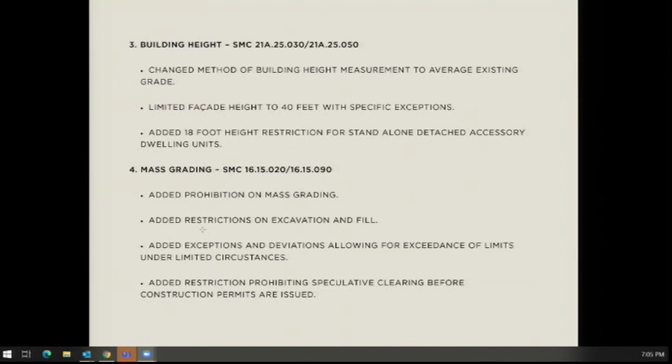Next slide. We also took on fence heights, where we added an allowance for fences up to 8 feet, limited to 32 feet in length along any setback line with an agreement from the neighbor and with the building permit. We also addressed parking, where we added a requirement that one additional parking space be provided for each new lot created through the subdivision process.

We added clarifying language regarding where the parking must be located, with a priority hierarchy. Next slide. We added a requirement that all new lots created through subdivision must have a presence on a private or public street through 30 feet of street frontage, and we added flexibility allowing averaging of street frontage across a project with a minimum of 20 feet and a cumulative average of 30 feet.

We also added a prohibition on work in critical areas without first obtaining a permit. We also refined the exceptions associated with that.

One thing I want to point out that I think is important for us to keep in mind is that although we made these changes in 2019, we have not seen many of them actually hit the ground in construction yet. As we've talked about before, a short subdivision or subdivision can have a shelf life of 12 to 14 years, and you might find that some rules from the past are still being built, or some projects vested to rules of the past are still being built today. That may continue for several more years, since these rules were just put in place in 2019.

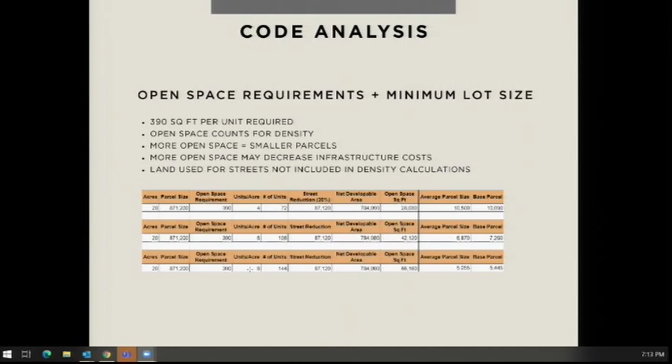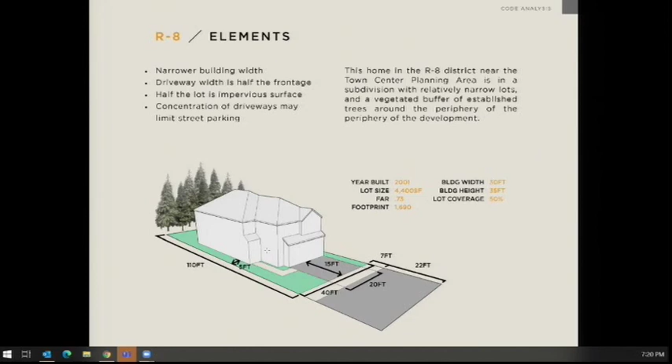This is another R6 example, and you can see it's very similar. The lot is a little bit wider, but you have a 30-foot driveway here, which again takes up a good portion of the frontage. It's almost a 5,000 square foot lot, with a floor to area ratio of 0.7. So even though it's R6 versus R8, you're getting a very similar development outcome, and that's partially because of the ability to set aside land as open space and count it towards your project density.

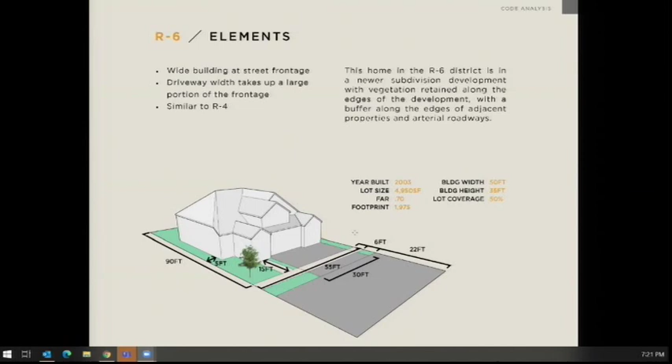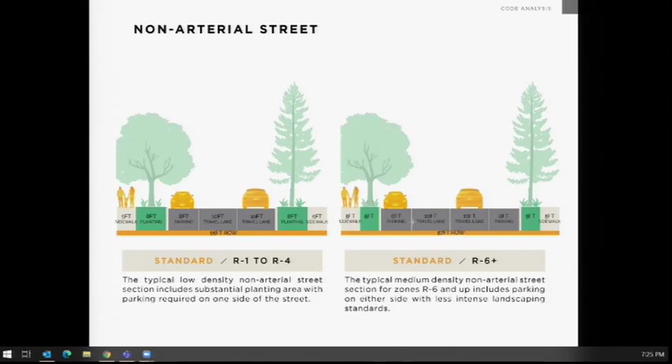The result is you end up with an unnecessarily wide set of travel lanes and parking, which can induce higher traffic speeds and potential safety issues. So one thing we're trying to do is right-size that amount of parking. We certainly don't want to undershoot, because there have been parking challenges in some neighborhoods, but we also don't want excessive asphalt and parking where it's not needed—it contributes to environmental issues with stormwater runoff, and it's expensive to build and maintain. So we want to be a little more targeted in how we apply these street sections.

And with that, I'm going to turn it over to Leslie to talk about the design principles, which are the first part of our neighborhood design standards section. So Leslie? Great, thanks Jeff.

The design principles really get at the question of what do we care about, what are we trying to accomplish with all these standards we're writing. These spring from the comprehensive plan, the vision statement, what people care about and want to see in their neighborhoods. We found the input we've gotten over the course of the project has been very consistent with what's spelled out in the comprehensive plan. So these are a basis for our decision making and what we're trying to accomplish with the regulations.

One thing we've heard loud and clear is that Sammamish really values the ecological function of the land and natural systems. So what can we do with these regulations to make new development fit better into the ecological systems that are there? This includes retaining the form of the land—you can't transform the site to create the easiest footprints for your buildings. Your development has to fit onto the site itself. Retaining the trees is important, and retaining them in a way that they will stay healthy for the long term.

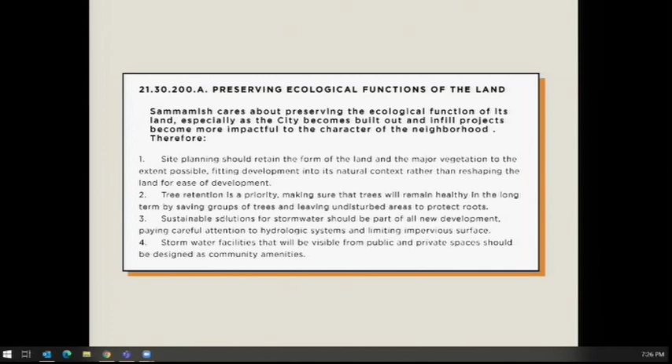The green Northwest character goes along with that. So that's talking about landscaping, buffers for sure, and the issues with topography, so that grade is handled in a sensitive way rather than just cuts and fences and retaining walls. There's a lot of solutions for doing that in ways that are attractive.

The interface that's public along the street is something that we care about the most. As you can see from the examples that Jeff showed, the garage entries really have an impact, whether the whole street ends up being frontage for the garage, or whether landscape can be incorporated in that important public face of homes along the street.

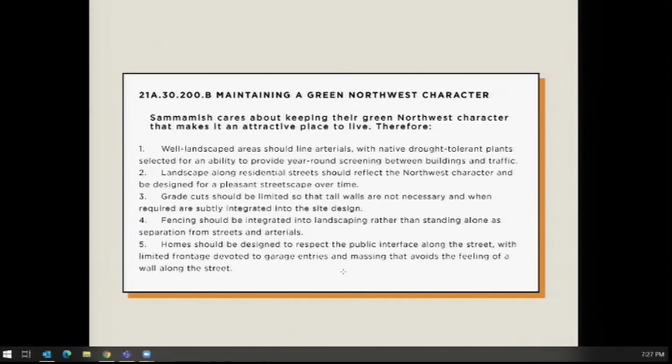The well-connected community is in a lot of ways about a walkable neighborhood. A lot of people are talking about 15-minute neighborhoods where you can walk easily to schools and small businesses. So the idea of having kids and bikes be able to move around neighborhoods is really important. There's some great examples of that out there with some shared streets.

In the neighborhood guideline thinking, we want to make places where people feel comfortable walking, where walking is an attractive option, especially where vehicle speeds can be lowered.

We also want to make it family friendly. Sammamish is very much a family friendly city, and the idea of people being able to walk and bike comfortably of all ages, 8 to 80.

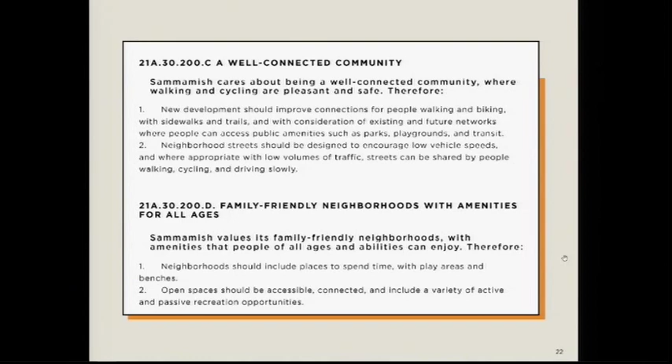That's something that when people especially are thinking about the subdivisions and the larger developments, planned unit developments, those are the kinds of things where some of these linkages, some of these gaps can be reconnected or connected.

Thank you, Leslie. So the design principles are intended to be more explanatory and to orient the applicants around the goals of the comprehensive plan and what the community would like to see in terms of development outcomes.

Oftentimes you'll hear developers or designers say, just tell us what you want. Sometimes it's hard to interpret from a series of just technical standards what exactly is the desired outcome. So those design principles are intended to support that conversation.

Applicants will be required to submit as part of their application statements on how they're furthering the design principles. But when it comes to approving or denying a project in terms of the review, the design standards will carry the day. And that's what these sections are—they are essentially the implementing piece for the design standards.

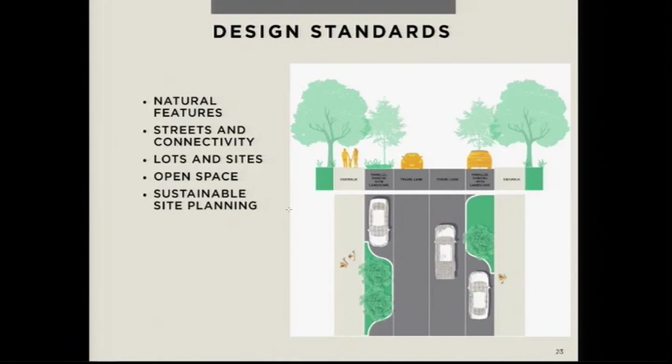So the topics include protection and incorporation of natural features, streets and connectivity, lots and sites—so how you're laying out your parcels and your developable area—some new criteria for how we deal with the preservation of open space to address some of the issues I described earlier, and sustainable site planning, which primarily deals with stormwater and other approaches to dealing with runoff in more environmentally sustainable ways. I'll just highlight a couple of the standards.

One of the things that was in our scope early on is to develop arterial frontage standards. So this would be for new subdivisions in terms of how they relate to one of these arterials. This map shows major arterials, minor arterials, and collectors. Those streets highlighted would all be subject to these new arterial frontage standards.

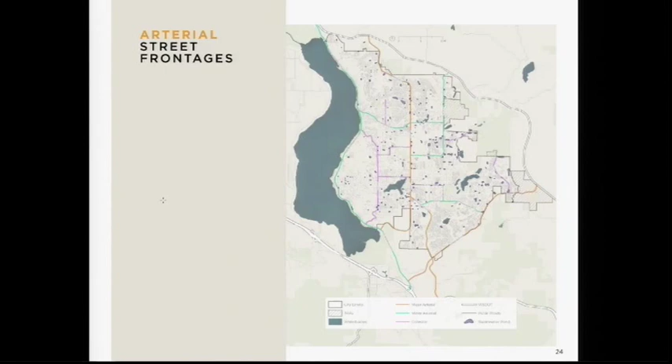I'd also like to point out that because the city allows for the set aside of open space or buffers and that it be counted towards density, none of these standards should limit the number of units that can be developed. Overall, the design standards are exactly what they are intended to be, which is to influence the design of the project, but they're not necessarily meant to be limitations on the number of units that could be developed. It's more around how you organize the features in your development.

We've developed a number of arterial frontages that would be allowed on those streets, and I think the default one is the forest. So like the tree farm, if there is mature forest that contributes to that Northwest character, we'd like to see that preserved—preserved for the first 100 or so feet, with some modifications that can happen as part of that. There are opportunities to, within that area, integrate trails or open space features. Again, this would not reduce the amount of units that could be developed.

The next one is stormwater or green infrastructure. There's lots of examples along arterial frontages of stormwater ponds. Some are simply large vehicles for retaining water with chain link fences around them and really not much vegetation.

Others, like this diagram here, which is a representation of a real example I believe on 8th, is a more natural looking stormwater pond. It's got a nice split rail fence, nice vegetation. It's a visual and physical amenity. And so the standards do address the design of stormwater facilities when they're placed along an arterial frontage.

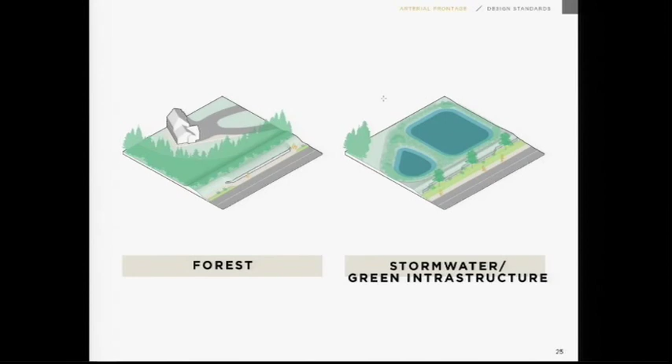And again, this land that's set aside, as is currently in the code, can be applied to project density in other parts of the site, so it doesn't reduce the number of units that can be built.

Landscape is another one. So in areas where there isn't mature forest that can be protected, you could have a landscaped area or buffer. There's some flexibility on this in terms of its width that we've incorporated into the code based on comments we've gotten from the public during the public hearing.

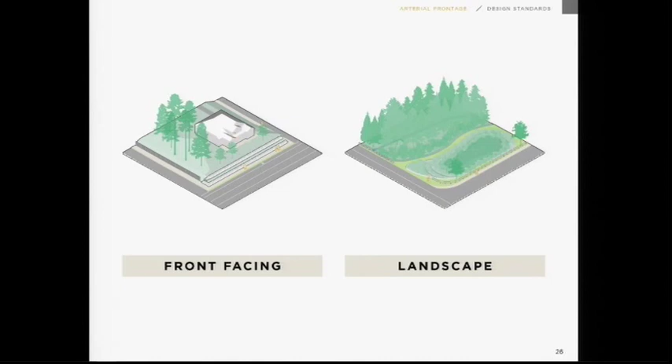This front-facing applies only to existing lots. So if there's an existing lot that's already been subdivided for single family, you have to orient your house towards the arterial with access from the side or rear. So we don't just have rear decks or rear parts of the facade facing directly onto the arterial. There are some examples where developers have already done this in the community.

Open space. There is an open space requirement, 390 square feet at least. You could choose to locate that along the arterial frontage, use that density elsewhere in the site, but create a nice visual character along the arterial and provide amenities for people that live in the neighborhood.

So that's a highlight of the arterial frontage standards. Now moving into site design.

These standards address primarily the relationship of the size of the home, what you see above ground. So this would include your garage and anything above ground. It would not include a basement or anything below ground.

What we're proposing is that there be a base limit floor area ratio of 0.5. So the size of your home can be no larger than half the size of your lot. If you have a 5,000 square foot lot, you can have a 2,500 square foot home. If you want a larger home, then you're going to need a larger lot. And as we just showed, there's flexibility to do that within the existing code.

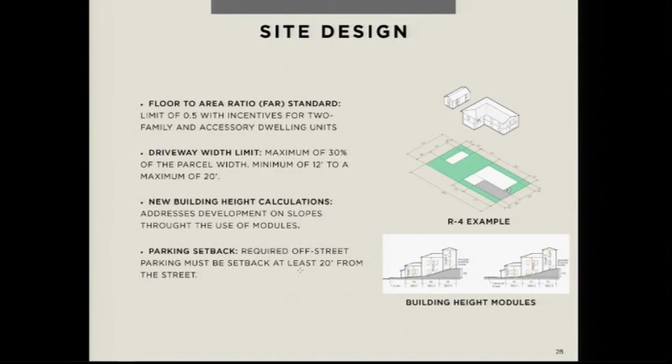Here are more examples, and there's lots of flexibility in how this could be designed. For example, a 10,000 square foot lot could have up to a 4,500 square foot main house, or you could reduce the lot size for a smaller home. With an attached garage of 440 square feet and a detached ADU of 1,000 square feet, you'd end up with lot coverage of 28% building coverage and 61% yard area, the open space left over from buildings and driveway. This also provides more green space for green stormwater approaches, with an emphasis on achieving more on-site retention and infiltration.

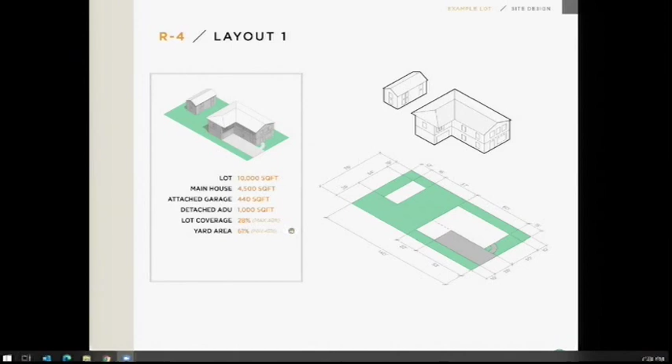This is another option. The previous example showed a narrow lot along the street edge; this one shows a wider lot, and both can work. You can see the 20-foot driveway, with the house oriented the long way, but still with opportunity for an ADU, on-street parking, and areas for stormwater treatment.

Clearing and grading. We've made some fairly significant proposed changes here. Under the current code, there were quite a bit of exemptions for clearing and grading—if you weren't dealing with significant trees, or only dealing with relatively small trees, less than 12 or 8 inches caliper depending on the type, which is still fairly large, you could go in and clear.

What we're proposing is that to get a clearing and grading permit for an individual lot, you have to have an approved land use permit, which requires showing a site plan of what you're planning to develop—where the house footprint will be, where the driveway is, and so on—as opposed to allowing mass grading and clearing at the subdivision level. That's a big change; it would essentially eliminate preemptive clearing and grading of sites. Things like understory, which is very important for stormwater and the environment, would be preserved until development, which I think will have a major impact.

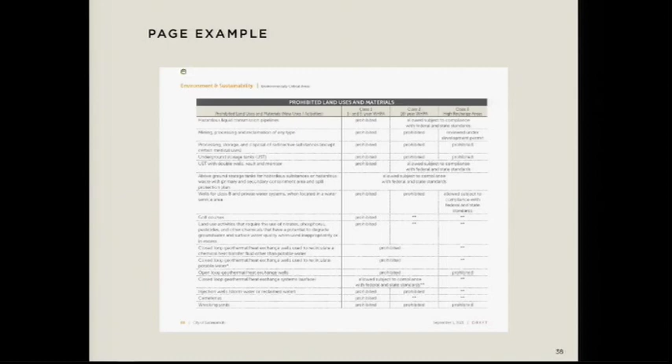This is just a table example, an existing table from your critical areas section, with a nice consistent look and feel. You can see the header has changed to highlight the chapter.

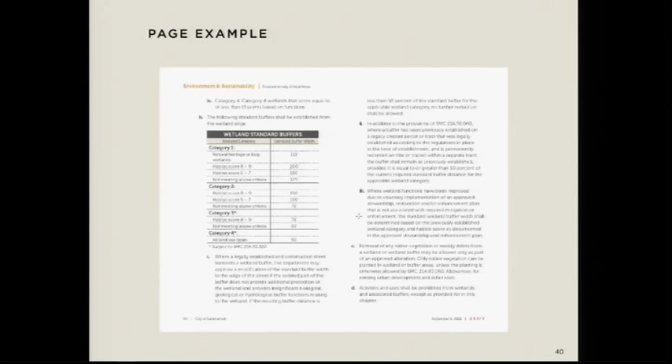Here's another part of that section showing a smaller table and how it nests into the column. And finally, we chose one page that had an existing graphic. Many of the existing graphics had poor resolution, so we didn't choose them, but this is from the Town Center Code, and you can see the existing graphic works well in the new format.

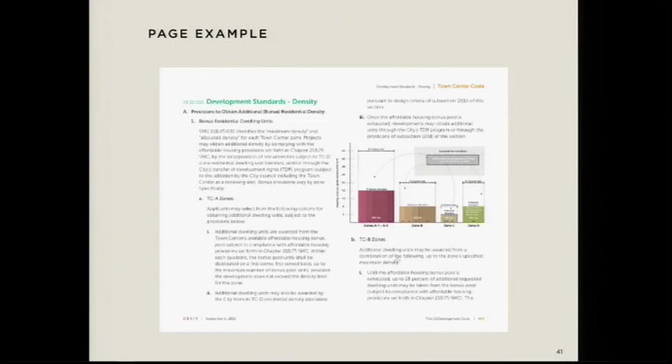And that's the conclusion of our presentation. I just wanted to take the opportunity to thank everyone that's participated in the process to date: the members of the community advisory group, those that took the survey, and the many members of the public that have attended the planning commission meetings and provided really valuable comments that we've incorporated into changes. The success of a project like this really depends on public input and participation, so I just wanted to thank everyone that's participated. And with that, I'll turn it back over for any questions or discussion.

Okay, we do have a couple of questions from people in the chat box. So first one up is Councilmember Odell.

Let me go to my questions. On the Highcroft example, you showed a bunch of open space that was set aside. I was wondering, was that originally buildable land or wetland that was not buildable?

David can correct me if I'm wrong, but we didn't look into that in great detail. I believe it is counted towards the density, so it was at least theoretically buildable land. And then there's some pretty steep topography on some of it. That's why I was wondering.

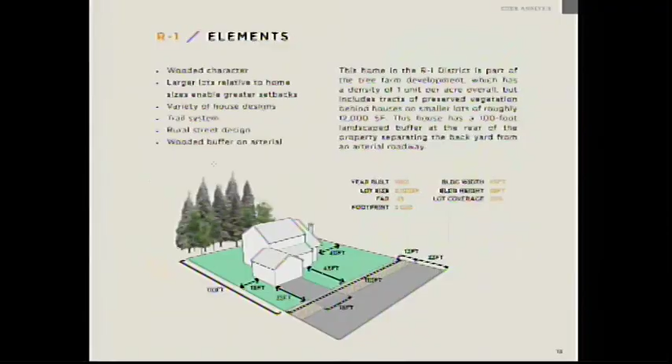One, going back to the floor to area ratio, I thought when Councilmember Odell asked about that, you said that the floor to area ratio took into consideration all of the floors above ground. So when we say we have a 0.5 limit on floor to area ratio, I can make it a two-story house, but it's going to include the area of both the first and second story, correct?

Correct. Okay, so we're not going to see people saying, well, I'm going to have a smaller footprint on the ground, so I have the right setbacks, and I'll just build it taller. We're limiting that as well with that floor to area ratio. Correct. Okay. Yep. Go ahead.

It's a volume limit. Yeah. It's essentially a control on bulk and scale, and so that's why everything above ground is included. If you're below ground, that's not counted towards it.

Fair enough. And just wondering, is the 0.5 limit only apply to like the R1 through R8 zoning? Because you did mention that it's a little bit different for multifamily, which I think is important, right? Because you have different goals and different purposes for the multifamily and the higher zone, the more compact areas. Would that be accurate? Yes.

Okay, great. And are there other differences in those zoning areas? Because again, I do think it's important to have these standards in our R1 through R8. But when you get up into higher than R8, we really do have different goals and different purposes. So I would think that a lot of these standards are going to be different for those. Is that also accurate? Yes, that is accurate. Some of these standards don't apply in those zones.

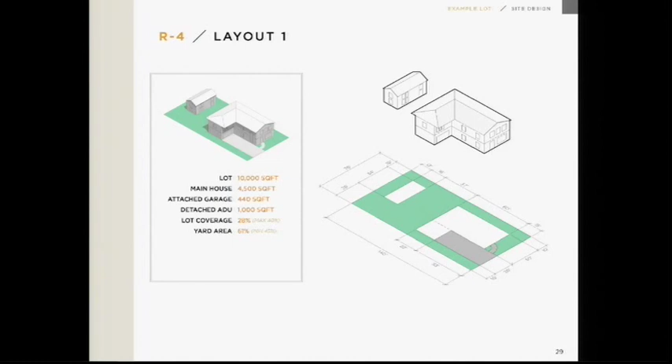And then last but not least, this is kind of separate, but I love that you created standards for the fonts and the colors. I think that's really important to give us consistency. The one question I have is did we put these through an accessibility review? Just looking at this, some of the contrast seems a little bit low, and if you have any vision challenges, that can make it really difficult to read.

Thank you for bringing that up. We will go back and make sure it meets the current standards, and if we have to make changes, we will. We did an accessible document recently for culture, so we've gained some experience in that, and we'll make sure we hit the target on that. Thank you, great, thanks so much, this is wonderful.

Thank you. Okay, I'm trying to see who my other hands may be here. I've got my hand up. I'm just not sure you can see it. No, it's difficult, you kind of got yellow everywhere. So I'm going to go to Deputy Mayor.

Thank you, so a couple of thoughts as other folks were talking. David, when Councilmember Stewart asked about the bulk of projects still vested to older code, you mentioned the 2019 regulations, but there was another set of regulations prior to those, is my recollection. The reason it's in my mind is, I believe it was last week, we approved Stone Creek, which is the carrier plat, and I had to ask some questions because when I drove by, I was like, I know that backyard is not 15 feet.

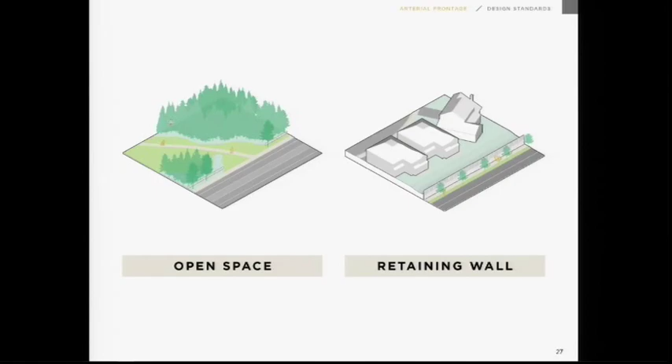So it'd be interesting to understand from a development standpoint—and I understand we're probably not going to see another Laurels be constructed, nor a Highcroft, because the amount of land just doesn't exist anymore. But the difference between a Laurels neighborhood where we have small home sites, smaller homes, not a lot of space, so they're not putting a lot of trees on their property, but they were able to maintain kind of the forest around it and that buffer that I think Councilmember Odell and I had hoped for moving forward.

How many trees in that ideal setting are preserved through the buffer versus having the floor area ratio where you have 0.5 and a smaller footprint of a home on a lot, and the ability to preserve trees? I suspect we're able to preserve more trees, frankly, in the Laurels scenario than we would be, because they might be able to plant new trees if they have like the 0.5, but we're not preserving the older trees. Which, frankly, in the wintertime, do a better job than a small tree that doesn't have a DBH of 20 inches or something like that.

But I would be interested, I guess, to know where the benefit is. Yeah, I think there is a better chance of preserving mature trees in the Laurels model, in buffers and in open space. And I think primarily one of the reasons is that preserving trees on individual lots, particularly if they're significant trees, can make construction more challenging, and they would also have to provide financial guarantees for those. So I think there may be some aversion from developers to preserve trees on individual lots.

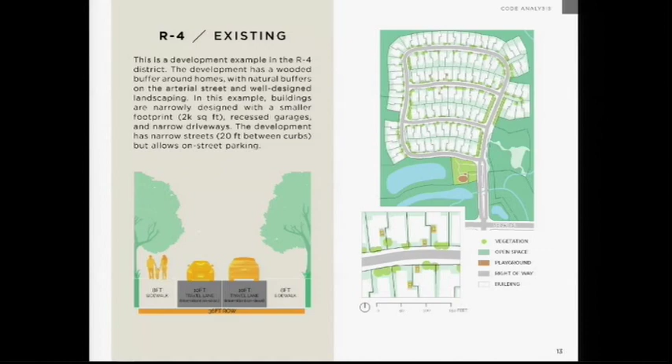Thanks, and guys, great job on this report overall. I really do like what I'm seeing in it. I do have a couple of comments, though. First of all, if there was one development that created a lot of hate mail the last time I was on council, it was Highcroft. I've never seen such a negative reaction from the residents of Sammamish to a development as that one generated. So please don't let that happen again. A couple of things.

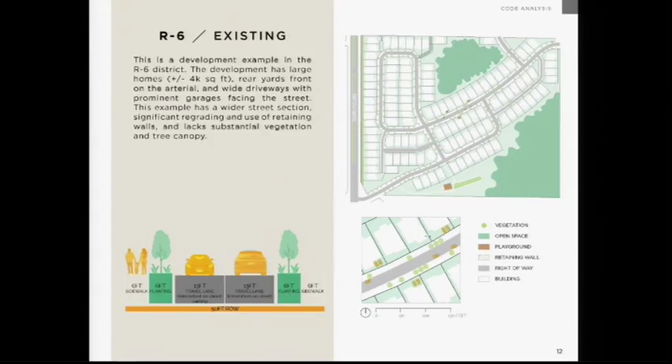David, I think you mentioned side setbacks. We're now at 5-foot side setbacks, I believe, as a minimum for like R4 and anything, I think. We used to have 7-foot setbacks, and the fire chief only reluctantly agreed to go down, his arm twisted. But we've had a couple of structure fires in recent years where the setback has been, shall we say, a little tight, and the adjoining structure got involved very easily.

So that's one thing. Second thing is going back to your comment about the effect on tree planting capability. You may not be able to plant a sequoia there, but you might be able to get a smaller evergreen or deciduous tree in, if it was bigger, where you can't get one to grow in a 5-foot setback area, or not grow well, put it that way. Dual use of certain things, I want to mention this.

My neighborhood, Heritage Hills, on the north part of Sahalee Way, is now 30-some years old, but it has a lot of very mature trees now, many growing up along the trails between the houses in the right-of-way, plus the stormwater facility. The whole thing drains into one big storm drainage facility in the park. To drive by, you wouldn't realize what it was. It's flat, there are goalposts at both ends, and during the dry season it's a playfield. During the wet season it's usually not covered with water, but I've seen as much as 1.5 feet of water in what I call Lake Heritage. It trickles out gradually, metered down to the creek.

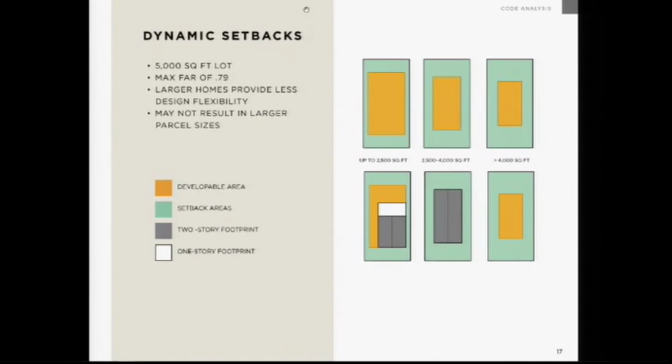What we wanted to do was, after a long conversation about how our code works and where we see common points of confusion on the part of the community, builders, applicants, residents, whomever it might be, our code is sometimes characterized as highly unorganized and difficult to read and follow. So we're really trying to make it accessible to everybody by putting it in a different format and bundling it together into a new restructured code that is more user-friendly and easier to find things in.

Understand that this is the first step in what will ultimately be our unified development code for the long term. We completely envision a Phase 3 to updating our development regs, where the council will have another opportunity to fine tune things once we have some working experience with the new unified development code. The council has the ability to set that work plan at the retreat coming up next year.

We'll definitely be looking forward to that fine-tuning stage, if you will. These three phases—the first phase was what I call the course adjustment, in response to community outcry over really bad outcomes, Highcroft for example. We made some real big changes to the code there as part of Development Code Regulations Phase 1, which began in September of 2018 and ended in May of 2019.

Following that, the council budgeted and made a priority on the department's work plan of Phase 2 development regs. What we were supposed to do with that is create a unified development code and continue to make meaningful adjustments to the existing code that would ultimately result in better outcomes in development in certain areas. We listed off those areas here in tonight's presentation.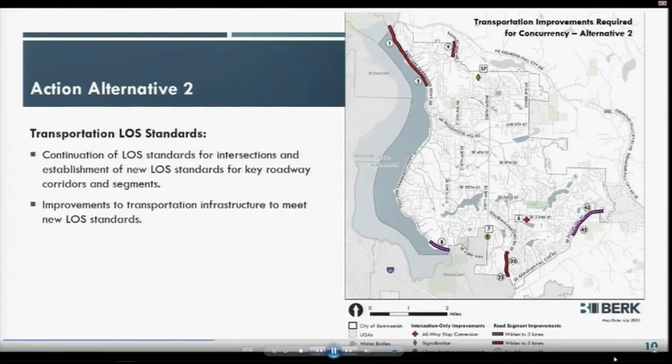Alternative 3 is similar to alternative 2 by establishing segment levels of service as well as intersection levels of service, but it also assumes that more people will choose to work at home and reduce those peak hour trips on the network. It also looks at a blend of housing types in the town center that are currently allowed in the zoning code, assuming a certain balance of those housing types that tend to allow for a bit fewer trips. As a result, compared to alternative 2, there would be a different suite of segment improvements needed to meet this set of land use assumptions.

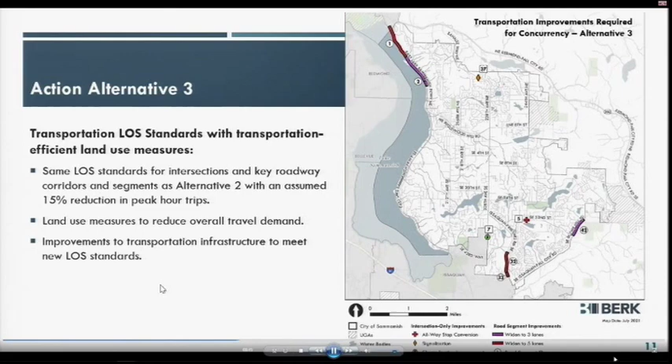Action alternative 4 is a more holistic look at what improvements could be made to meet the city's road standards and to focus investments at key corridors and segments. It includes all of the land use components of alternative 3 and the segment levels of service in alternative 2. But the combination of improving those key corridors to city standards and the land use measures results in a different location for those improvements.

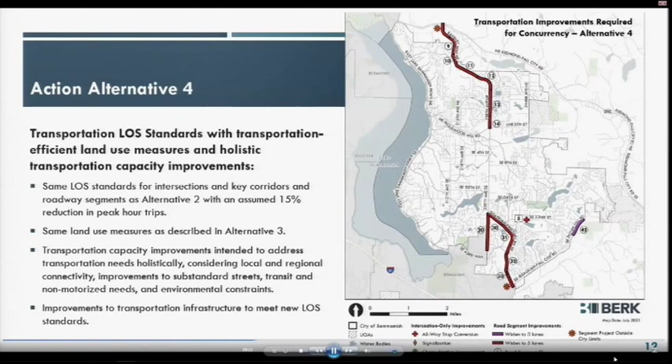So having compared those alternatives, we want to share some of the results by different topics represented in the draft EIS.

First, in terms of natural environment: because each of the alternatives have a different level of service standard and focus on intersections or segments, they result in different lengths of improvements and area of impervious surface, which has different effects for the natural environment. All alternatives would result in construction with potential for erosion and sedimentation. Some segment improvements could affect wetland or riparian buffers, some would require stream crossings, and some could occur in areas with tree canopy.

While we understand there may be these potential impacts, there are a number of mitigation measures that can reduce those impacts. That includes critical area regulations, stormwater regulations, implementing public works standards, and complying with both local and state permits like hydraulic project approval, which affects how stream crossings are designed.

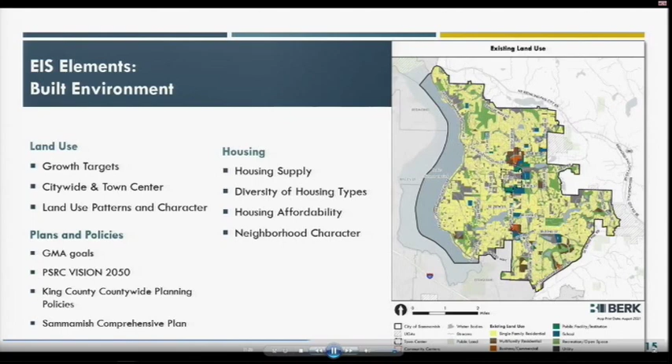In terms of the built environment, we look at the potential that the levels of service and concurrency programs could affect land use, housing, and plans and policies. We look at a range of policies from the state, region, county, and local levels, and consider the effect these improvements could have on the nature and type of housing and its affordability.

In terms of utilities, we looked at the present extent of broadband internet, its usage based on local information and surveys, and the policies and codes that allow unrestricted authority to provide telecommunication services to users. We don't anticipate impacts as a result of those policies and the current extent and usage.

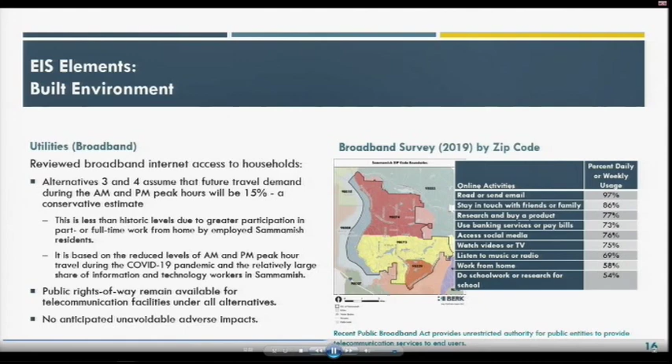Now I'd like to turn it over to Victor to talk about the transportation impacts.

Here we have a summary of those, primarily the amount of both motorized and non-motorized improvements required to meet the proposed level of service standards for each alternative. Of interest primarily are the total roadway improvement miles, ranging from alternative 2 to alternative 4, from 4.26 to 7.08 miles of new roadway improvements required.

Another interesting feature is lane miles improved, which looks at how many miles of roadway require improvements versus how many miles are being widened. Alternative 2 has just under 6 new lane miles of capacity added. Alternative 3 has a little more than 3.5, because of the reduced travel demand associated with it. Alternative 4 has the highest number of lane miles at over 13, because it's improving existing 2- and 3-lane roads to the city's 5-lane arterial standard as adopted in the 2016 Public Works standards.

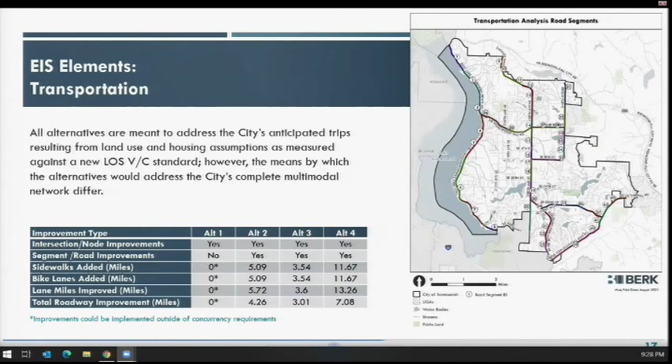We looked at 10 different transportation topics in the evaluation of the alternatives. Topics 1 and 2 are the current intersection level of service standard and the proposed corridor and segment volume-to-capacity ratio standards. Each alternative's projects are designed to meet those standards, so they don't require mitigation to meet concurrency—they do meet concurrency. Topic 3 is consistency with adopted local and regional roadway functional classifications.

There's a section discussing functional classification, which describes the character and objectives of an individual roadway: principal arterials are designed to carry the highest amount of traffic at the highest speeds, minor arterials carry less traffic and provide more local access, and collector roadways primarily collect traffic and feed arterials. In some cases, the projects required to meet the segment V over C standard were inconsistent with the roadway functional classification.

Primarily the northern segments of East Lake Sammamish Parkway, classified as a minor arterial, required improvements that look more like principal arterial improvements. So we've identified those areas where the required improvements were not consistent with that regional roadway functional classification. And in some areas, similarly, Sahalee Way or Issaquah Pine Lake Road, while functionally classified as principal arterials, had projects that look more like minor arterial projects on them. Topic 4, continuity with adjacent jurisdictions and facilities.

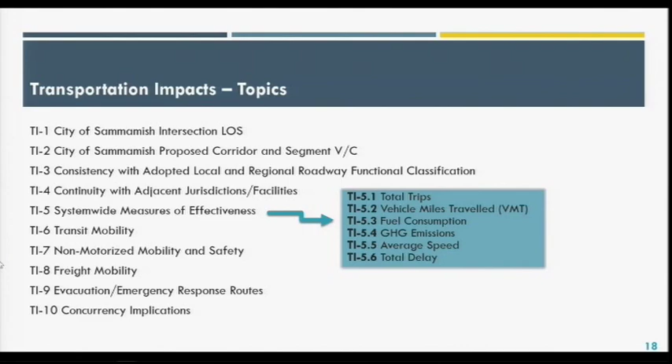We can go to the next slide. So going to those system-wide measures of effectiveness, again, these can be very helpful, both in terms of traffic performance and in some environmental impacts as well.

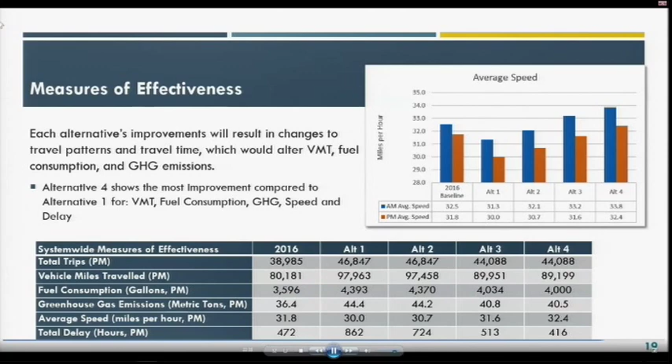Tips for commenting: summarize your concerns and be specific about pages or topics. You can identify where we can make the information more complete or accurate, identify possible solutions including mitigation measures, and the best combination of alternative features for the city to consider in a preferred alternative.

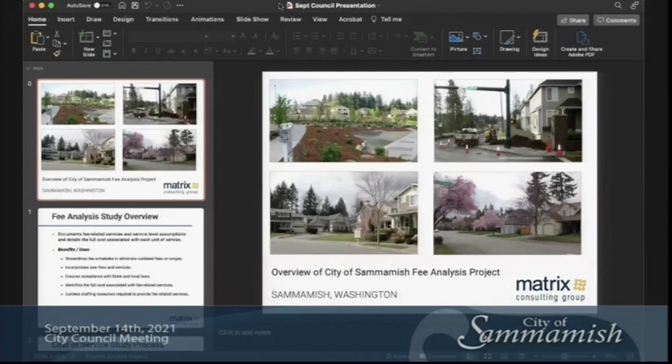Thank you, thank you David. I'm going to share my screen, hopefully. Here we go. All right, let's see. Can everybody see this? Okay, I got a thumbs up from David. I'm feeling good, we got it.

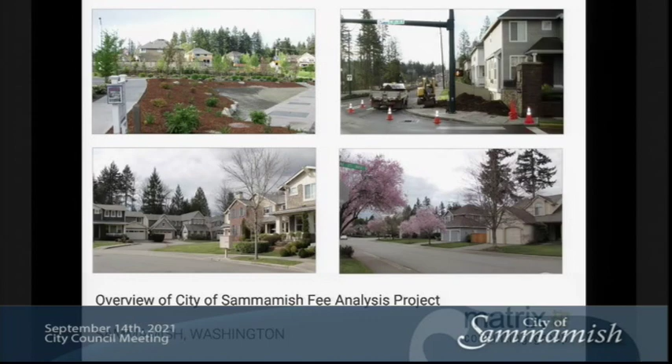All right, thank you all so much for your time this evening. My name is Courtney Ramos. I'm with Matrix Consulting Group, and we were tasked with doing a fee analysis for the city.

Quick little tidbit about Matrix Consulting Group: we are a national consulting firm that works with local government not only on cost of service and fee analysis, but also on process, efficiency, and staffing for development services - so planning, building, fire prevention, public works, things of that nature.

It's my pleasure to be here tonight to talk to you about this study and give you an overview of what we're doing, and a little preview as to the topics you'll be asked to think about and make decisions on when we come back to you in November.

Starting off with a brief overview of the fee analysis: what it does is document fee-related services. It documents the service level assumptions that go into those services, and it details the full cost of providing those services - the direct and indirect costs.

The key benefits and uses for this: it streamlines your fee schedule, so we get rid of all those outdated fees that have just been sitting on the fee schedule. We incorporate new fees or new services that we're now providing.

We make it clearer for the applicant as well as for staff to administer that fee schedule. We ensure compliance with state and local laws, making sure that the way we're charging things and how we've costed things out are in compliance.

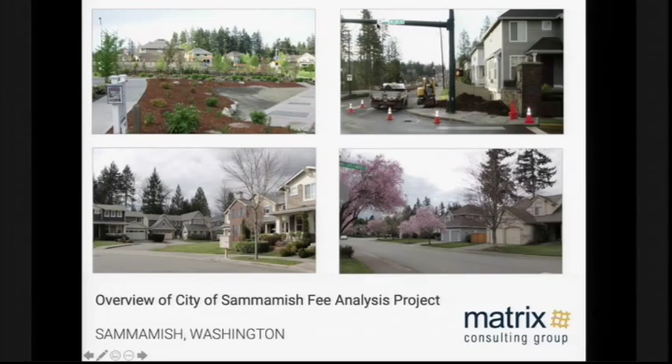Okay, I don't have anything else. I don't see any other hands, so that's perfect. Thank you very much, excellent presentation. Thank you.

Okay, the next thing up is the discussion for October 5th Joint Planning Commission.

Mayor Moran, David Pyle, Community Development again. I am here tonight. You're just a busy guy this evening. I am. I am going to attempt to share my screen with you. There we go, there it is. See, there it is. And one more click, and I'm here.